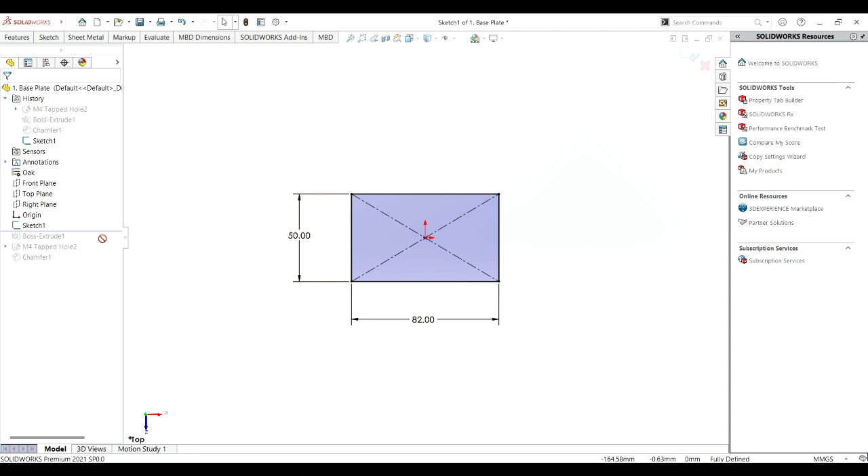Then I go to the extruded boss feature and extrude this rectangular shape for 16 mm height, and it will be like this. It will be a box.

There are 4 tap holes on the top of the base plate. First I make a center line between this point and this point, which is 41 mm, and this point to this point is 25 mm. I sketch a hole here and here, and mirror it, giving 4 holes. The length between this hole and this hole is 38 mm, and this hole and this hole is 35 mm.

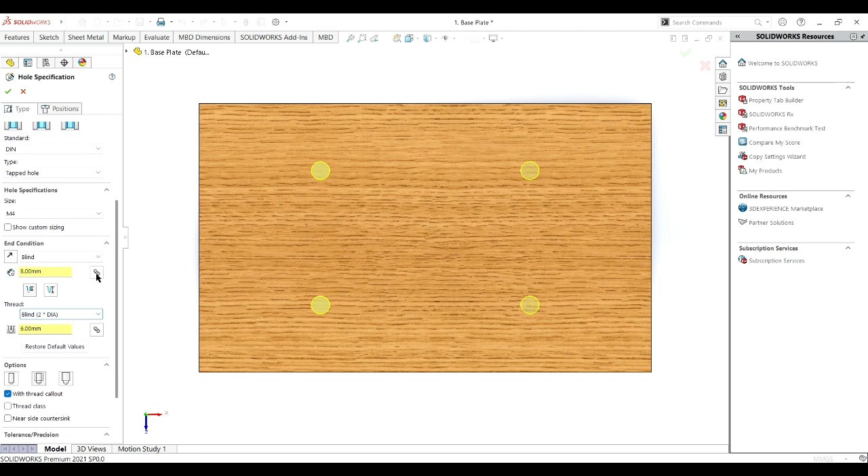I choose the standard and the tap hole type. The size is M4, with a hole length of 8 mm and a thread length of 6 mm. So it will be like this.

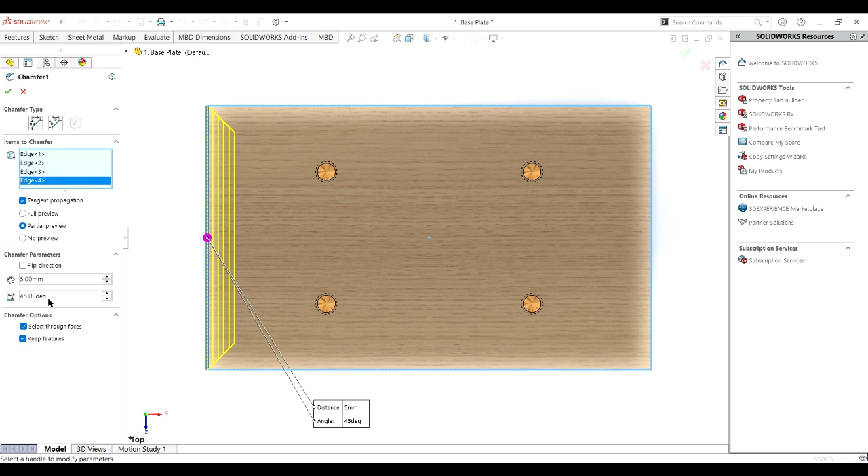Then I choose the chamfer feature. I go to the top plane of the base plate and choose 4 edges, this edge, this edge, this edge, and this edge, and set it to 5 mm at 45 degrees. The final result will be like this.

We move on to the second part of the pneumatic motor, which is the mounting bracket. I made a line here to here, up to here, here to here, and down here to here, and here to here. Then I choose these two lines to be collinear and equal, and set the length between this point to this point as 48 millimeter, this point to this point as 24 millimeter, and this point to this point as 16 millimeter.

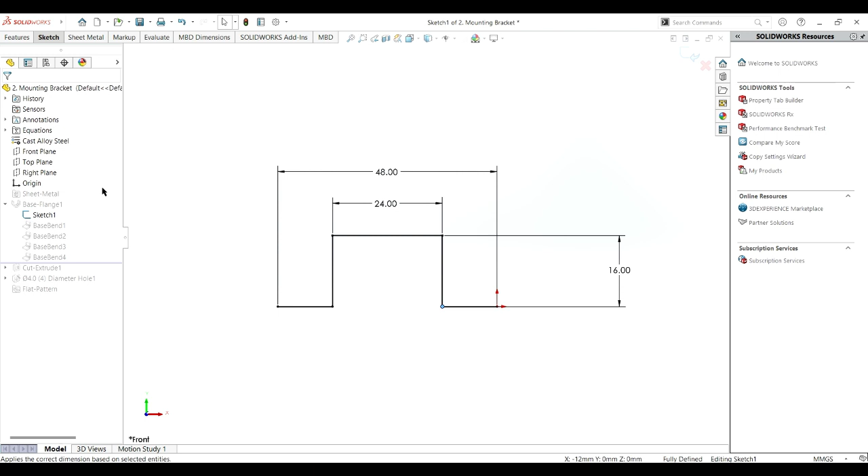Then I go to the features, the sheet metal features, and choose base flange, setting it to the blind direction with a length of 35 millimeter, and it will be like this.

I choose the extruded cut feature. Before that, I sketch on the top plane of the mounting bracket. The sketch is 14 millimeter, and here the length is 28 millimeter.

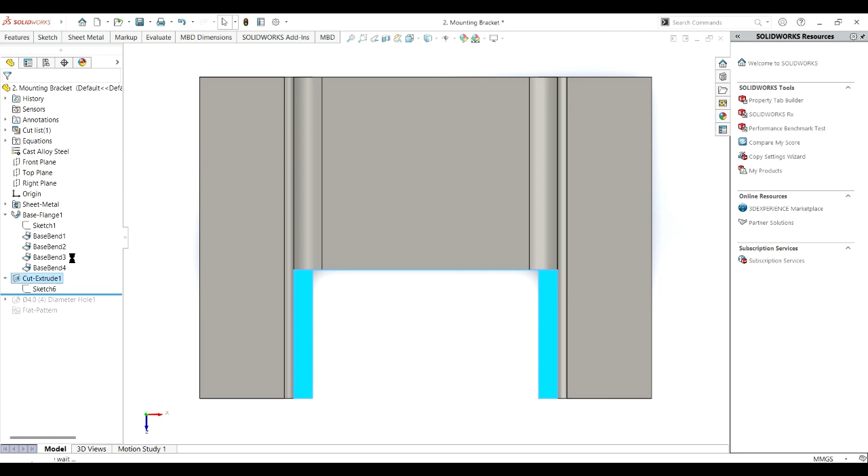Then I go to the extruded cut feature and cut the sketch that I sketched before on the top plane of the mounting bracket. I cut out this sketch, which is 4 millimeter, not 14, sorry.

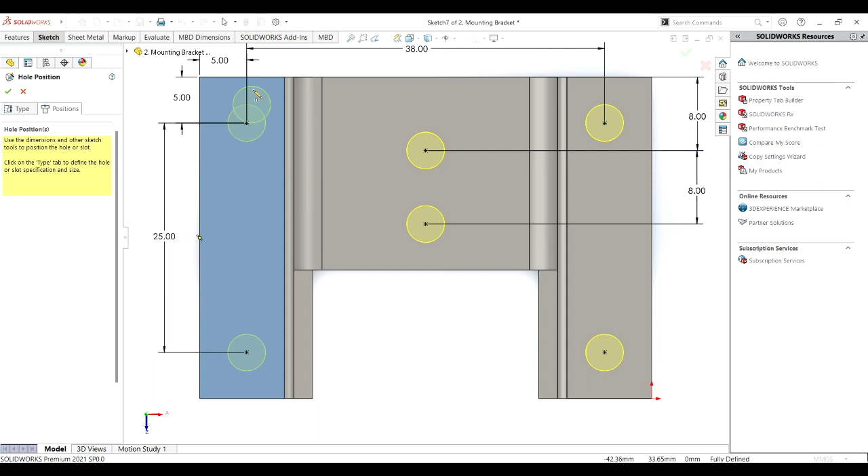We move to the top plane of the mounting bracket. I choose to make a hole, and the position of the hole, as you can see, this hole and this hole is 38 millimeter, the length between this hole and this hole is 25 millimeter, the length between these two holes is 8 millimeter, and the length between this hole and this line is 8 millimeter. I put this hole's midpoint to here as 5 millimeter, and also here midpoint to here as 5 millimeter.

Then I chose the standard DIN, the type is drill size, the size is 4 diameter, and the end condition is through all. So we click right, and it will be like this.

We move on to the third part of my project, which is the motor block. I start to sketch with a line from the midpoint, from this point to this point, then up to this point, then move to the right, make a line down to this point, then down to this point, move to the left this point, and up back to the midpoint.

We go to sketch and choose smart dimension, setting the length between this point to this point as 62 millimeter, this point to this point as 40 millimeter, this point to this point as 30 millimeter. You can see the length of the line is 21 millimeter, this length is 38 millimeter, and this length is 12 millimeter.

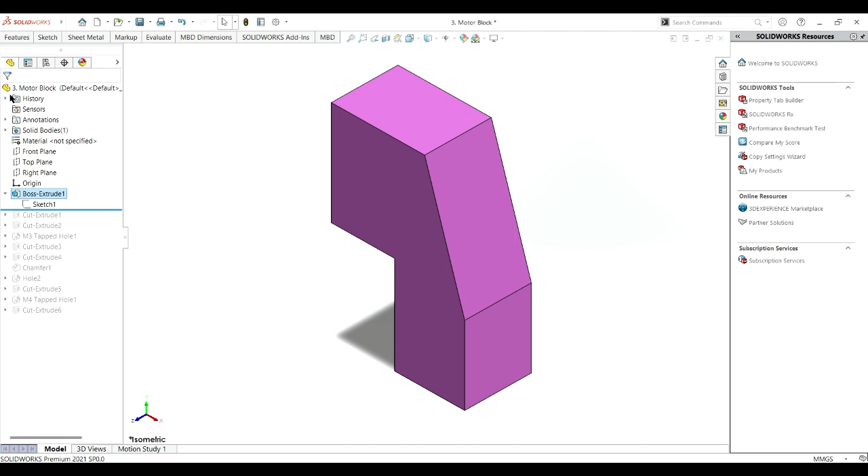And then I choose extruded cut feature, but before that I sketch on the top plane of the motor block. I sketch a circle, one big circle and a small circle.

I choose sketch and choose line here, and choose a center line, and I put a center line from here to here. And then I go to smart dimension, and then I choose this point, to this point, which is 10 millimeter.

And then I draw a circle from the center line, one big circle and one small circle, and the diameter of the big circle is 14 millimeter, and the small circle is 4 millimeter.

And I put the length between the center line of the big circle into this line as 10 millimeter, and then I draw a line between this point of the small circle to the big circle, and also mirror it to the bottom of the circle.

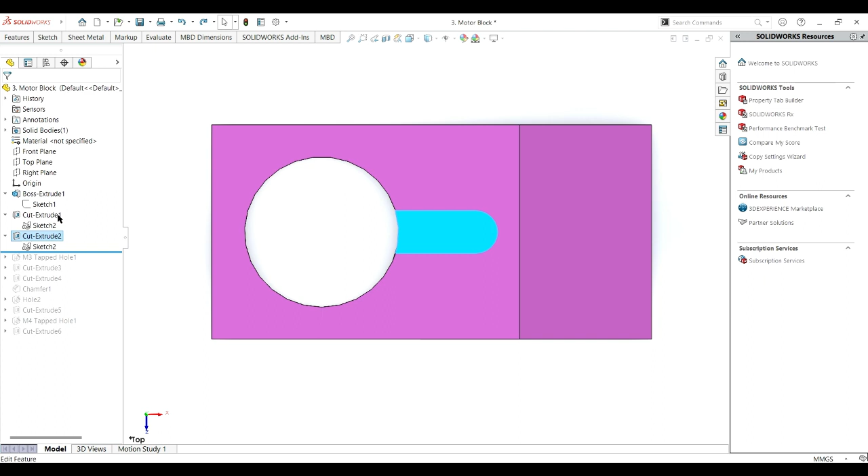We go to the extruded cut feature, and I take this area and this area, I put it on a blind direction and put the length to 2 millimeter.

And then I will do the 4 tap holes on the top plane of the motor block. First, I sketch - oh, you can see here.

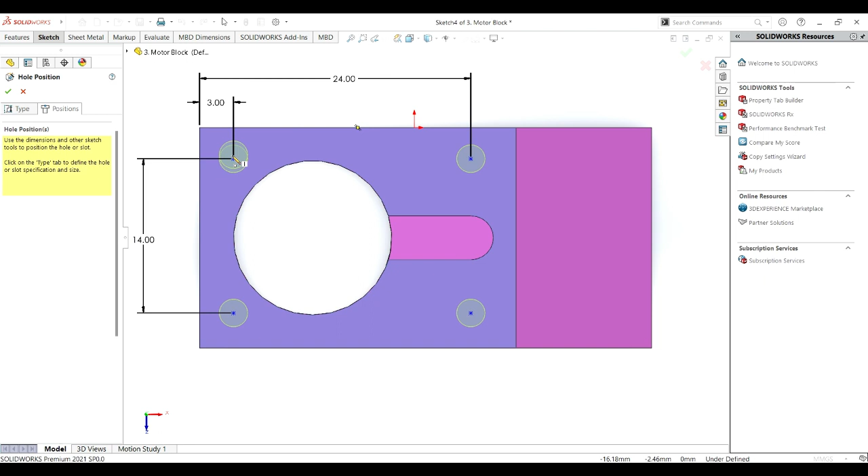So here is the position of the tap hole. I put it here, here, here and here, 4 holes, and the length between this hole and this hole is 14 millimeter, and this hole is 24 millimeter, and the length from the midpoint of this hole is 3 millimeter to the upside, and to the left side is also 3 millimeter.

And then I choose the hole standard as DIN standard, and the type is tap hole, and the size of the hole is M3, and I put it on a blind condition, and the thread length is 6 millimeter, and the hole length is 9 millimeter, and it will be like this.

And then we move to - I sketch the side plane of the motor block. I sketch a circle, and the diameter of the circle is 5 millimeter, and the length between the midpoint of the circle to the bottom line is 20 millimeter, and this point to this point is 8 millimeter.

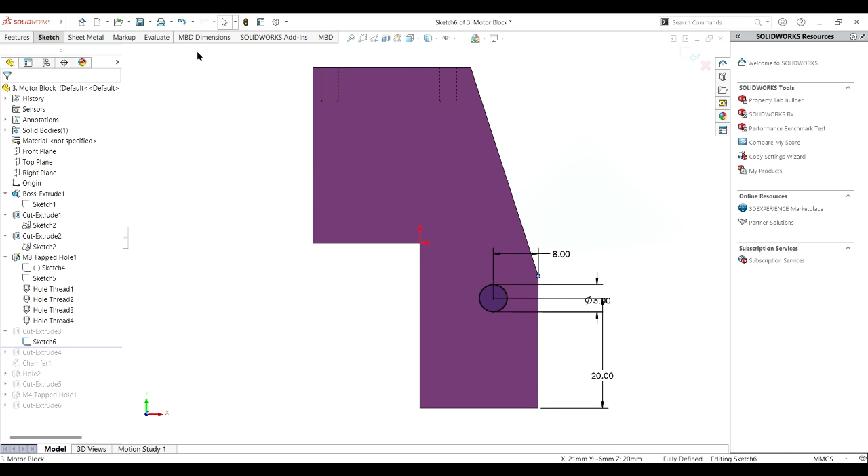So I choose, and then I choose extruded cut feature again, and I choose this hole, and I put the direction as through all on this sketch plane that I sketched before, which is the circle, and it will be like this.

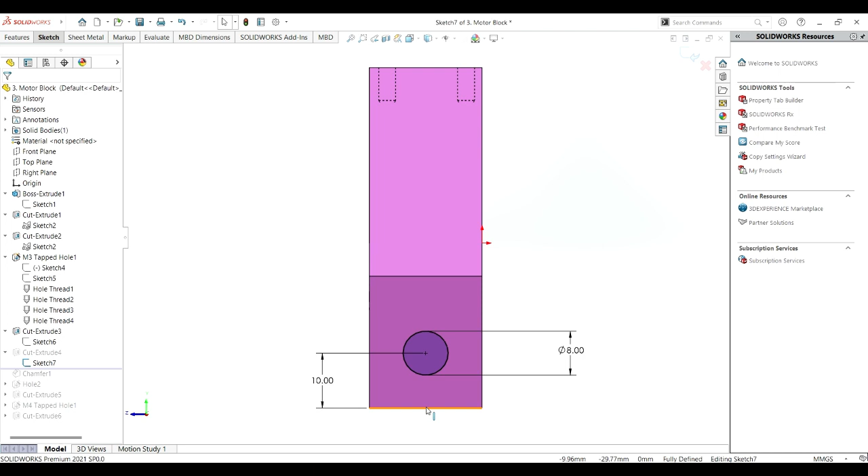So we move forward to the next sketch. The front plane of the motor block, I sketch a circle here, which is 8 millimeter, and I put it on the center of the motor block, and the length between the midpoint and this line is 10 millimeter.

And again I choose extruded cut, and I will cut out the circle that I sketched before, and I choose the direction as through all, and it will be like this. And here it is from the back.

And then I choose chamfer feature and take this edge at the circle that I've cut out before, and I choose the length as 1 millimeter and 45 degrees, and I click right here, and it will be like this.

After that I will make a hole. So here I choose the counterbore type, and then I edit the section dimension. The diameter is 2.5 millimeter, the depth is 48 millimeter, and the counterbore diameter is 4 millimeter, and the counterbore depth is 30 millimeter, and I put the end condition as up to next, and it will be like this.

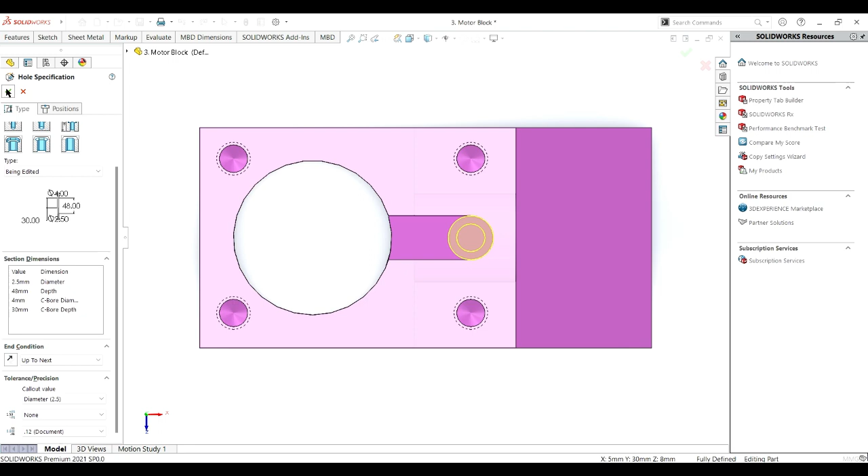As we can see here, the hole that we made here.

And then we move to the next sketch. Sketch two circles at the back of the motor block. The diameter of the circle is 3.2 millimeter, and the length between the midpoint of the circle to the upper line of the motor block is 17 millimeter, and the length between two circles is 6 millimeter.

And then I choose extruded cut feature, extruded cut feature, here.

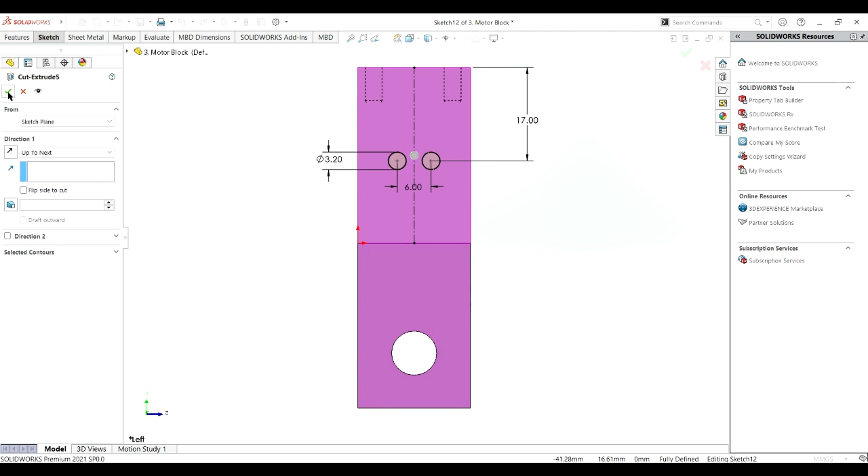I choose this circle, these two circles, and the direction is up to next, and I click right here, and it will be like this. We can see from the top of the motor block, these two circles is there.

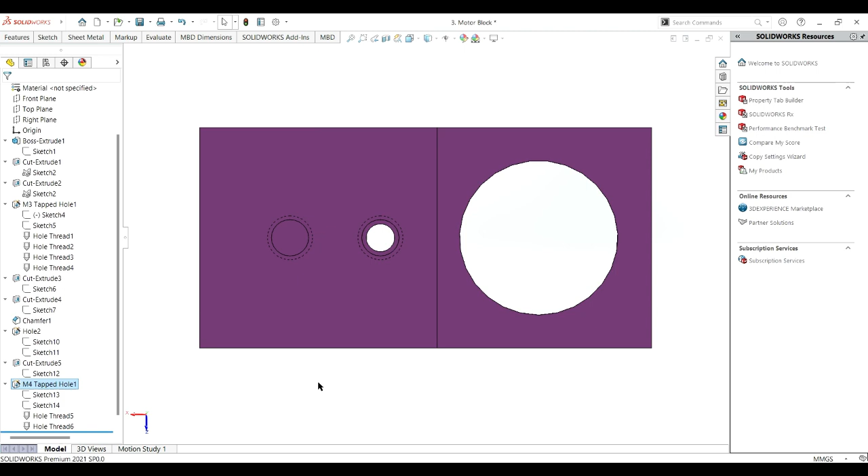Then I will make a hole at the bottom of the motor block. So I sketch two circles here and here, and the length between these two circles is 8 millimeter, and the length from the midpoint of the circle to the end line here is 8 millimeter. I choose the standard DIN, the type is tap hole, and the size is M4, and the end condition is up to next. So I click right here, and it will be like this.

As we can see here, the hole that we made is there. Okay, and we move on to the last sketch, which is on the bottom of the motor block.

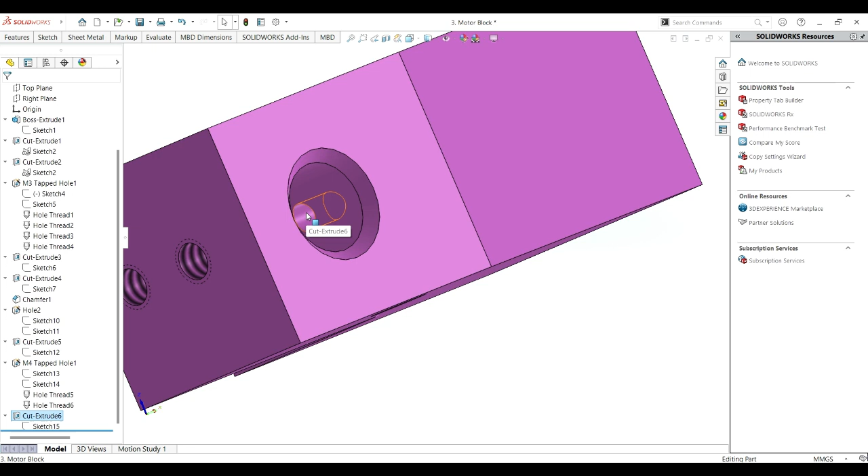So I sketch a small circle here, I will zoom in, is 2.5 millimeter, and I choose extruded cut feature, and I will cut the circle here that I sketched, and I choose the direction up to surface. I will click right here, and the circle will be there, up to the next here.

So the circle is there, and that's all for the third part of my project, pneumatic motor, which is the motor block. Next, for the next part is the cylinder head.

I choose the top plane, and I sketch a rectangular shape from the midpoint, and the width of the rectangular shape is 20 millimeter, and the length of the rectangular shape is 28 millimeter.

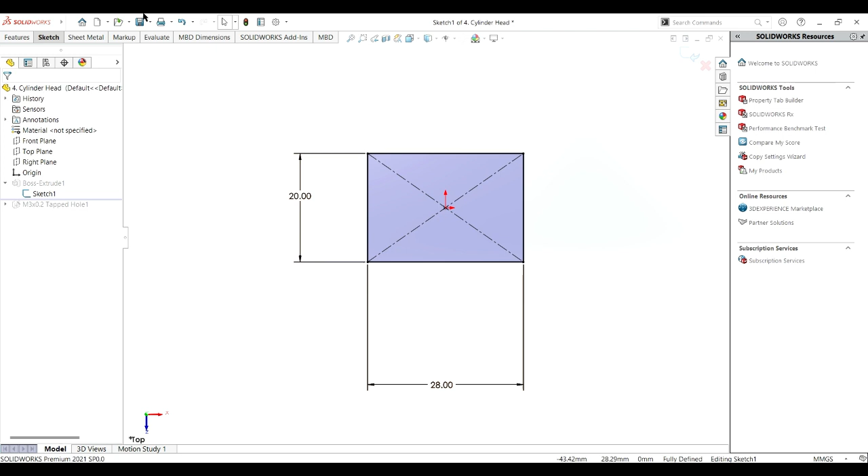Then I choose the extruded boss feature, and I put it in the blind condition, and the length of the extruded boss is 3 millimeter. So I will click right here and it will be like this.

And then there is a 4 tapped hole on the top of the cylinder head. So here is the position of the hole. There's 4 holes, and the length between this hole and this hole is 21 millimeter, and the width between this hole and this hole is 14 millimeter.

And I choose smart dimension, and then I choose this point to this line is 3 millimeter, and this point to this upper line is 3 millimeter also.

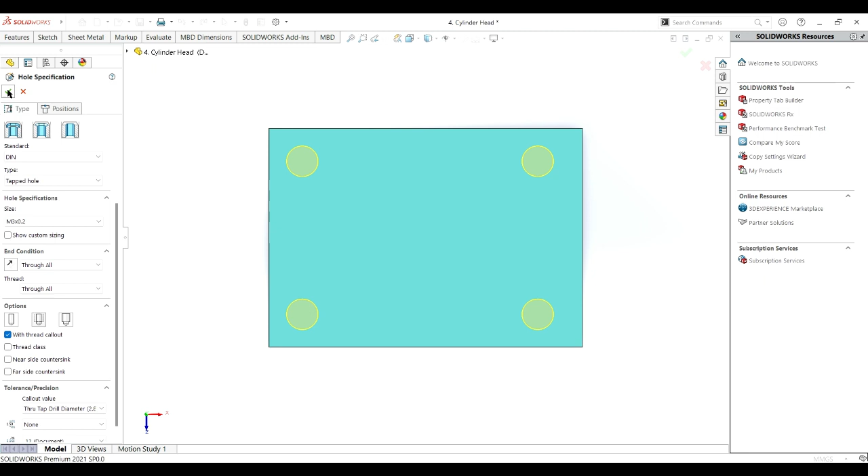And we go to the type, and I choose the DIN standard and the tapped hole type, and the size is M3 times 0.2, and the direction is through all. And I will click right here, and it will be like this.

So here is the hole with the thread. So I will change the transparency to make it look much better. So here it is.

Okay, for the next part, I will do the flywheel. First, I will make a circle, one big circle from the midpoint of the sketch.

Or before that, I choose the front plane, and I made a circle from the midpoint, which is 50 millimeter diameter. And then I made a construction circle which is 24 millimeter diameter, and I made this hole on the construction circle which is 10 millimeter.

And I go to the sketch, and I choose linear sketch pattern and circular sketch pattern, and I choose this one circle, and it will be 4 circles here on the sketch, the construction circle.

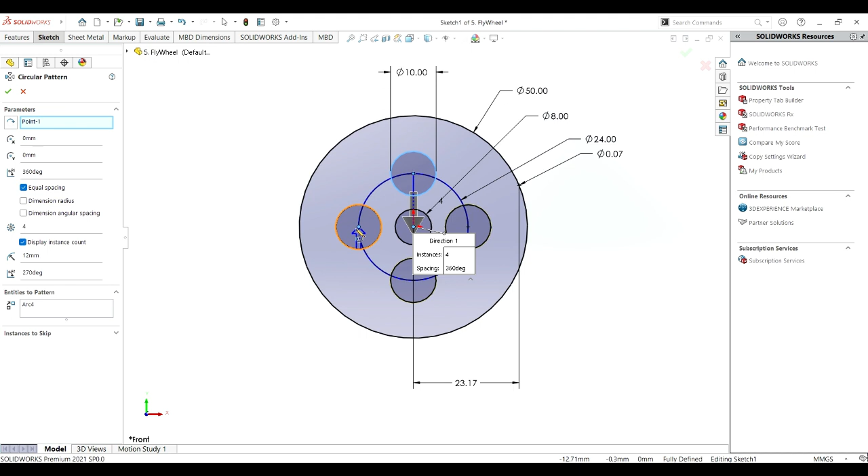And I click right, and then I sketch a small circle from the midpoint, and the diameter is 8 millimeter.

After that I choose extruded boss. I choose extrude boss, and we go to the front plane. So I choose this 5 holes that I sketched before, to the blind direction, and I put it 10 millimeter. So I click right here, and it will be like this.

After that, I will sketch at the back of the flywheel. So this circle here is 36 millimeter.

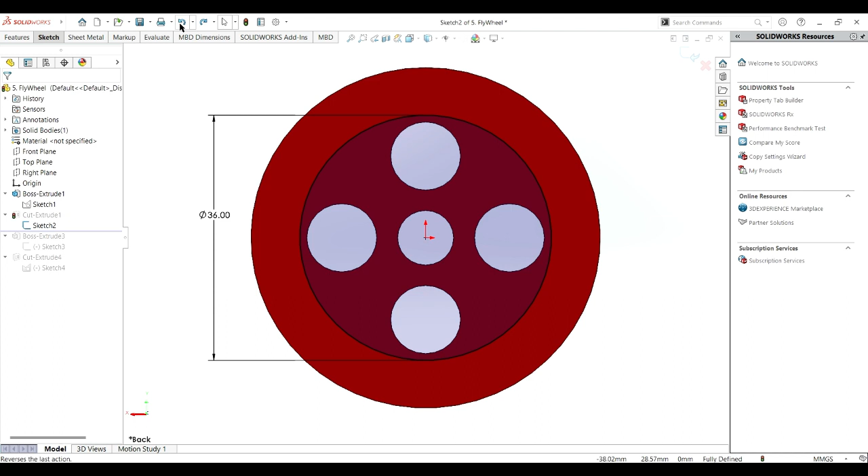And I will choose extruded cut to cut the circle that I sketched at the back plane of the flywheel. So I choose the direction is blind, and the length is 4 millimeter. So I click right, and it will look like this.

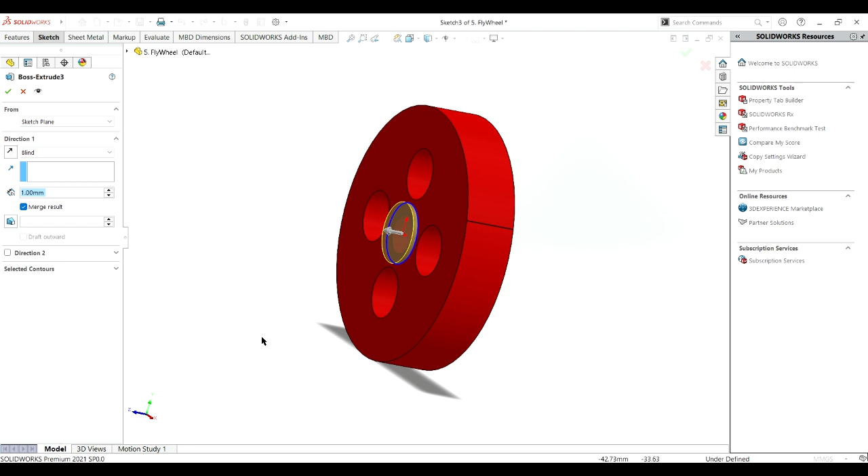After that, I will sketch a circle at the front plane of the flywheel. The diameter is 12 millimeter, and then I choose extruded boss feature, put it in a reverse condition and blind direction, and the length is 1 millimeter, and it will look like this.

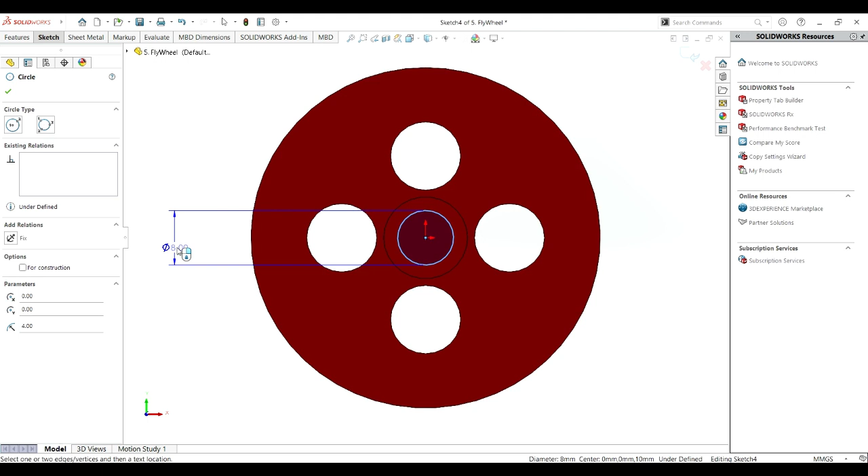Then I sketch on the front plane of the flywheel a circle from the midpoint, and the circle diameter is 8 millimeter, as we can see here. Then I choose extruded cut feature, put it through all and in reverse condition, click right here, and it will look like this. So here is the result of the flywheel.

And we will move on to the next part. The next part is crankshaft. I choose the front plane of the crankshaft, and I sketch a circle from the midpoint, and the diameter is 8 millimeter.

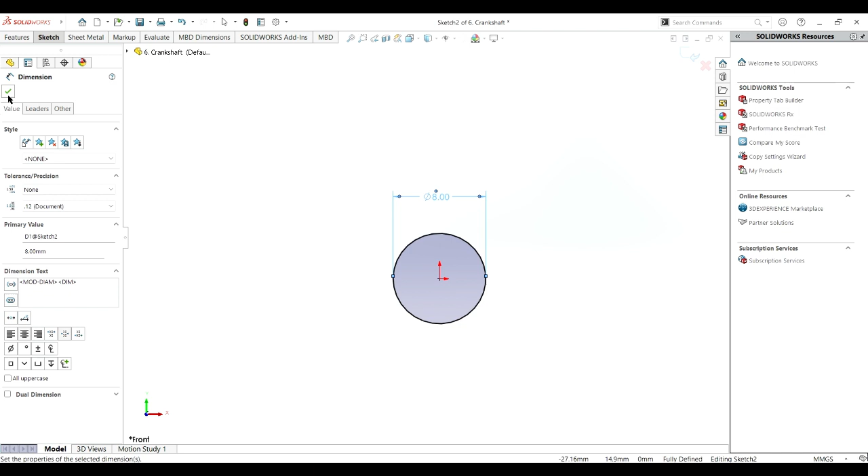And then I choose extruded boss feature and put it on a blind condition, and the length is 25 millimeter, and it will look like this.

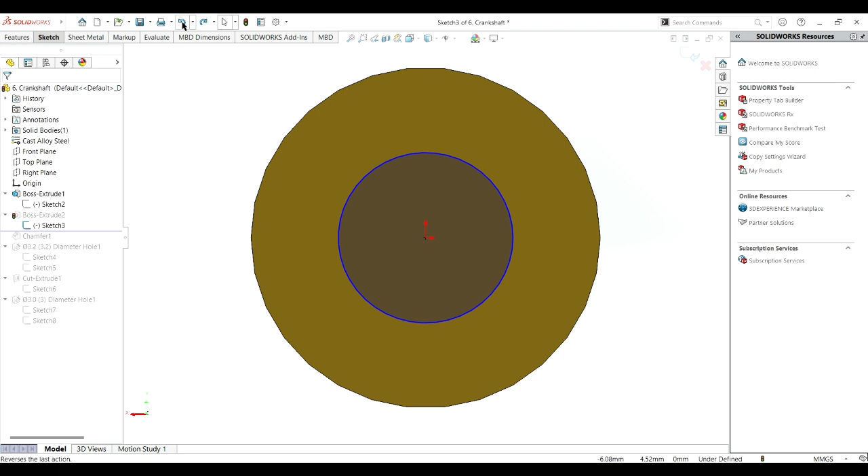Then I will sketch a circle on the top plane of the crankshaft from the midpoint, and the diameter is 4 millimeter. Then I choose extruded boss feature, put it on blind condition, choose the sketch circle I sketched before, and put it 12 millimeter length, and it will look like this.

After that, I will make a chamfer on the top of the crankshaft. I choose this face, and the distance is 0.5 millimeter, and the angle is 45 degree. I click right here, and this is the result of the chamfer.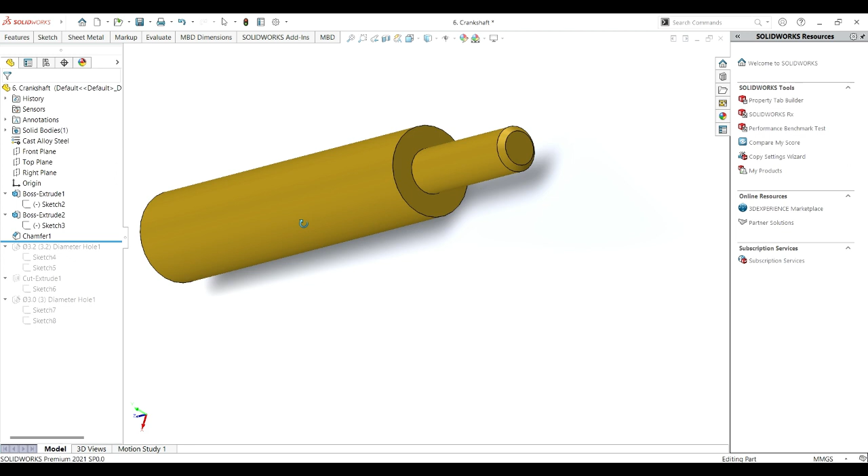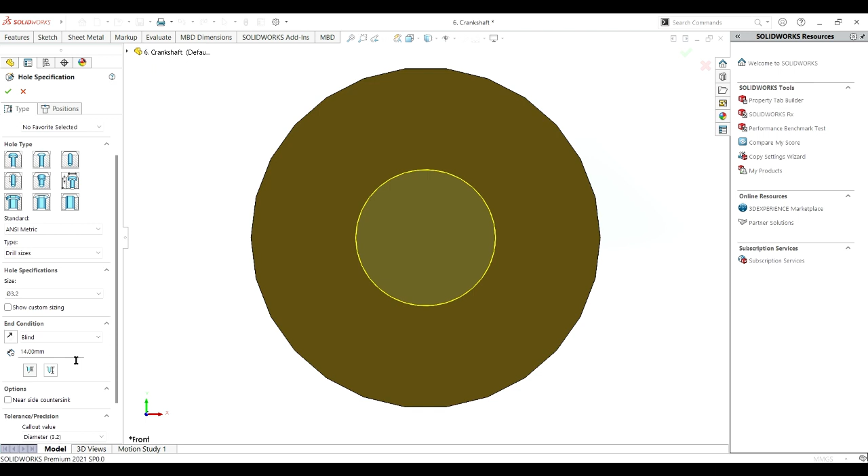After that, I will make a hole at the front plane of the crankshaft. Here is the position of the hole, I sketch a circle from the midpoint. I choose the standard ANSI metric, and the type of the hole is drill size, and the size is 3.2 diameter. I put the condition on blind condition, and the length is 14 millimeter. The thread length is 14 millimeter, click right here, and it will look like this.

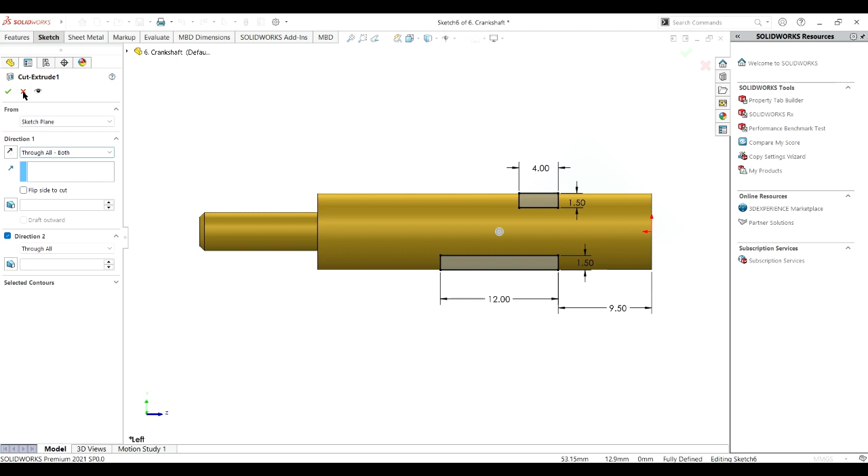And then I will cut. So we go sketch on the side, right plane of the crankshaft. I sketch a rectangular shape here, width 1.5 millimeter and length 4 millimeter, and at the bottom I sketch another rectangular shape, also width 1.5 millimeter and length 12 millimeter, with 9.5 millimeter between the two points. Then I choose extruded cut feature on the side of the crankshaft, choose both rectangular sketches, direction through all, choose both, and it will look like this.

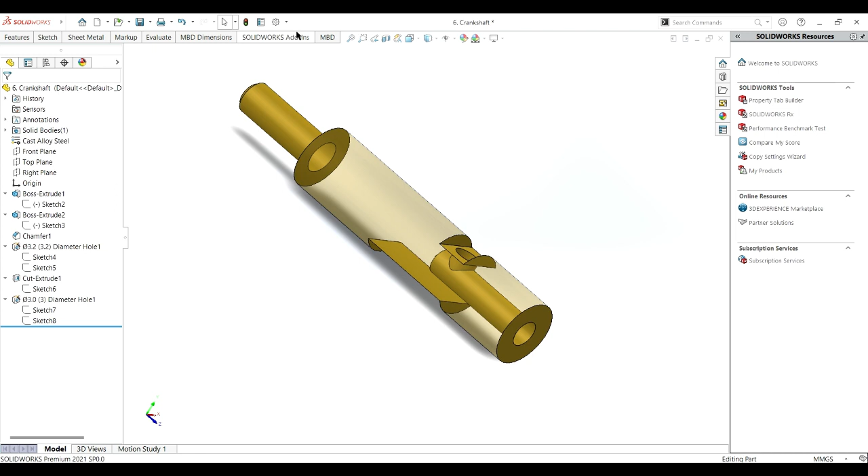Lastly, I will make a hole on the surface that we cut before. I drew a circle on this surface, put it at center, and the standard is ANSI metric, the type is drill size, and the size of the hole is 3 millimeter diameter. I put the condition as up to next, so it will look like this. I will change the transparency to see the hole. And this is the final product of the crankshaft.

For the next part, I will do the crank of the pneumatic motor. First, I will sketch a circle from the midpoint which is 11 millimeter diameter, and I made another two circles, choosing the same circle from the midpoint, each 8 millimeter diameter.

I made this circle 8 millimeter diameter, and also this circle 8 millimeter diameter, then I choose trim entities and remove the arc here and here, and the arc down here and down here, and there is already empty here.

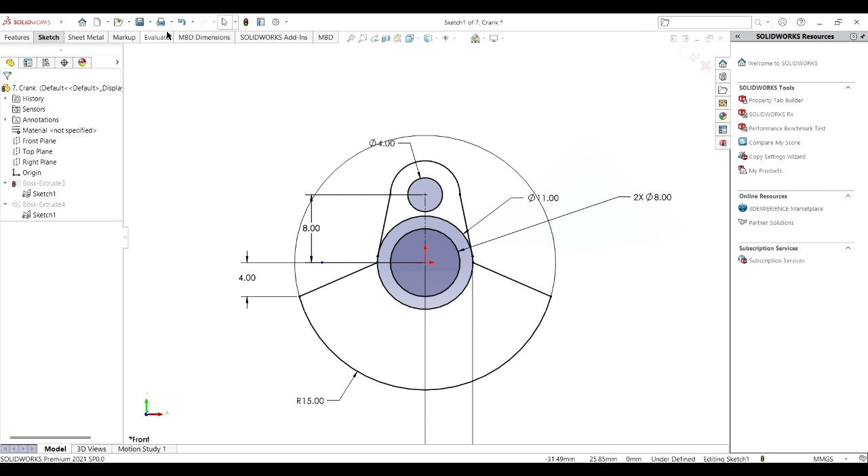Then I choose a line here, and put a line from this point at the 8 diameter to the 11 diameter circle, and also at this side. Then I choose center point arc, and from the center point I go to here and drag to here, and this is the arc. Then I choose this line and connect the arc at this point to the 11 diameter circle, and also this side, and then I define all that.

So the length between these two circles is 8 diameter, and this circle is 4 millimeter diameter, and this big circle is 11 millimeter diameter, and this inner circle is also 8 millimeter diameter, and the arc is 15 radius, and the vertical length from this point to this point is 4 millimeter.

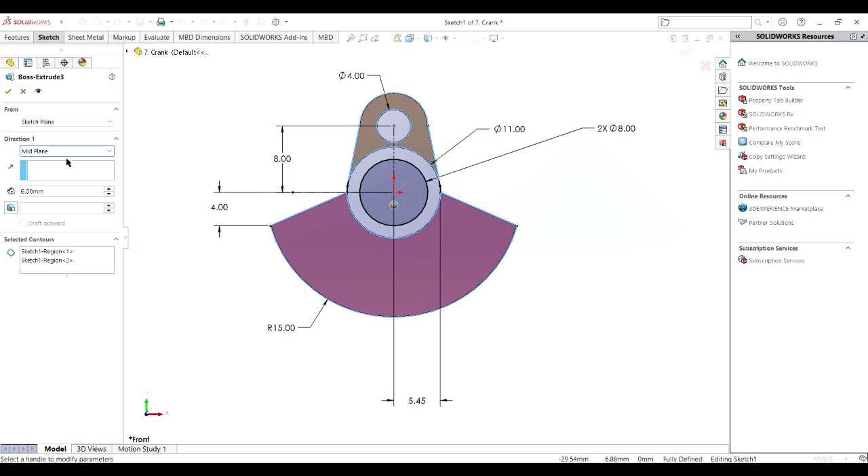And then I choose the extruded boss feature, go to the front plane, and I choose this surface, this one and this one, and I put it on the mid plane direction, and the length is 6 millimeter, and it would be like this.

After that, we'll hit the extruded boss again, and I choose the other circle here, which is between the 11 millimeter diameter circle and 8 diameter circle, and I put it on the blind condition, and I put 6.5 millimeter length. So it will be from here, from the back to the front. So it will be like this. And this is the result of the crank.

For the connecting rod of the pneumatic motor, first I do a construction line here, which is 35 millimeter, and then I sketch a circle.

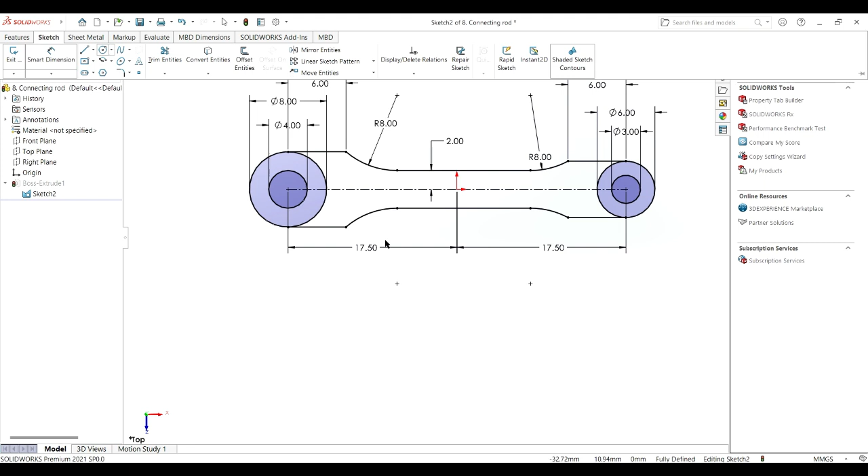Then I made a line. I choose this line, and I made a line from the mid point here, this point, and horizontally to this point, and this is 6 millimeter, and also at the right side from this point on the circle.

Vertically horizontally to the left side 6 mm, and I take the mirror entities and mirror this, and it will be at the bottom also and on both sides.

I made a line at the middle here. Here I made a line from this point to this point, and I also choose the mirror entities to mirror it to the bottom side.

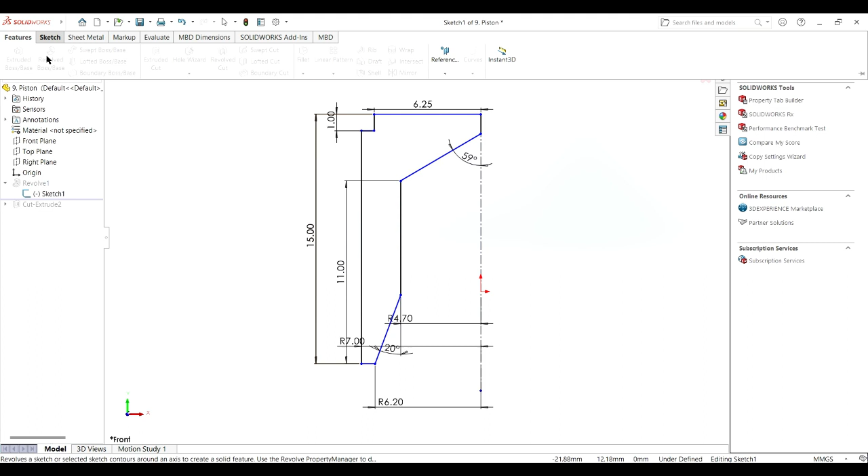After that I choose the revolve boss or base feature, from line 1, which is the center line, and I put the direction on blind, and the angle is 360 degrees, the whole thing, and it will look like this, and the piston will look like this.

Then I will sketch a circle at this surface, and the diameter of the circle is 3 mm, and the length between the midpoint of the circle to the bottom line is 7 mm. This circle is already centered because of the center line before.

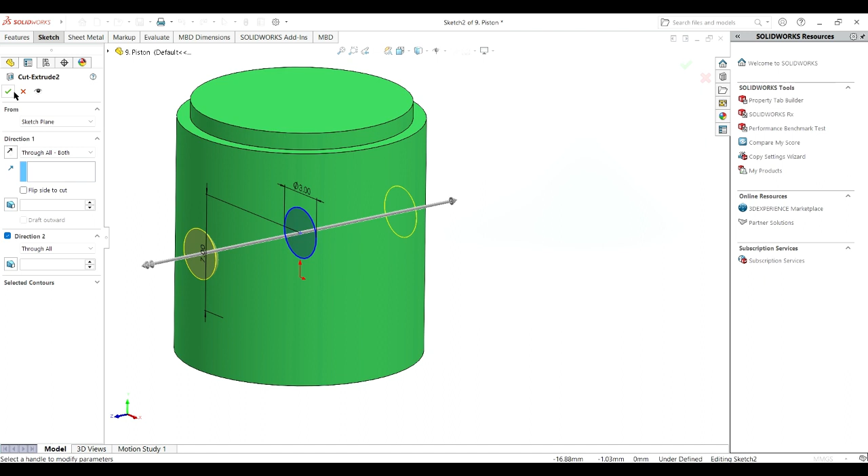Then I choose the extrude cut feature, and from the sketch plane, the circle sketch, I choose the direction through all to both sides, which is this side and this side, and I click right here, and it results in this. So this is the isometric view of the piston.

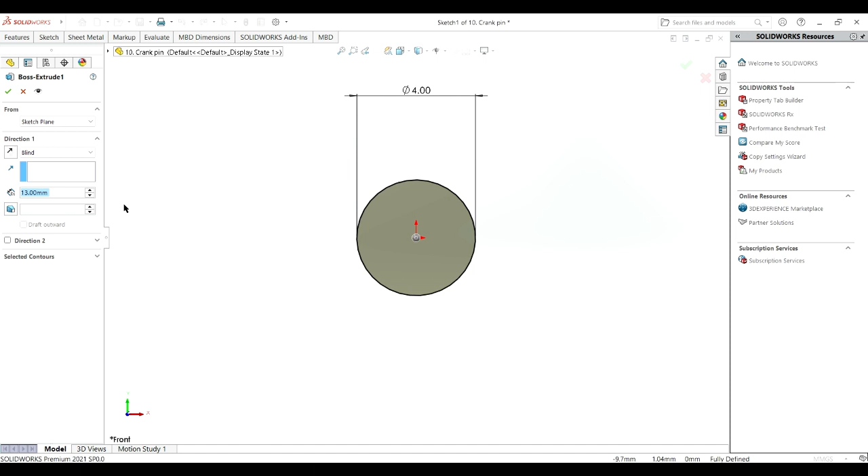We move on to the next part, which is the crank pin. First, I choose the front plane of the crank pin, and sketch a circle from the midpoint, with a diameter of 4 mm. I choose the extruded boss feature, and from the sketch plane I choose the blind direction, with a length of 13 mm. Roughly it will look like this.

So I click right here, and then we move on to the next sketch. The next sketch is at the top of the crank pin. I sketch a circle with a diameter of 3.8 mm, and then I choose the extruded cut feature.

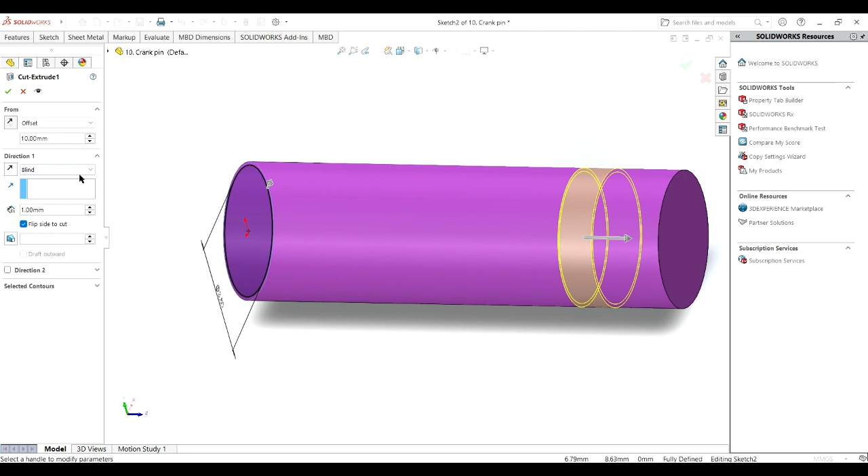I choose offset here, and the direction is blind. If we choose the sketch plane, it will be like this, but I choose the offset, and the cut will be here. I put it on the blind direction, and I cut it 1 mm. So I click right here.

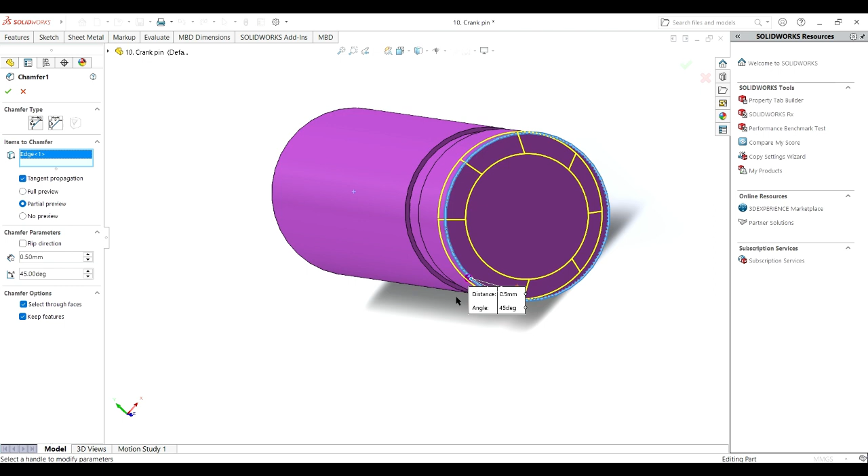After that, I will choose chamfer. I go to this side and choose this edge of the circle, and the distance of the chamfer is 0.5 millimeter and the angle is 45 degrees. I click right here, and this is the final product of the crank pin.

After that, we will do the piston pin for the pneumatic motor. First, I choose the front plane, and then I sketch a circle. I sketch this circle, and then make a smart dimension and set the circle to a 3 millimeter diameter.

Then I go to the extruded boss feature, and I choose from the sketch plane that I sketched before. The direction is mid plane, and the length is 13.5 millimeter. Roughly it will look like this. When I click right, it will be real like this, and then I will do the chamfer.

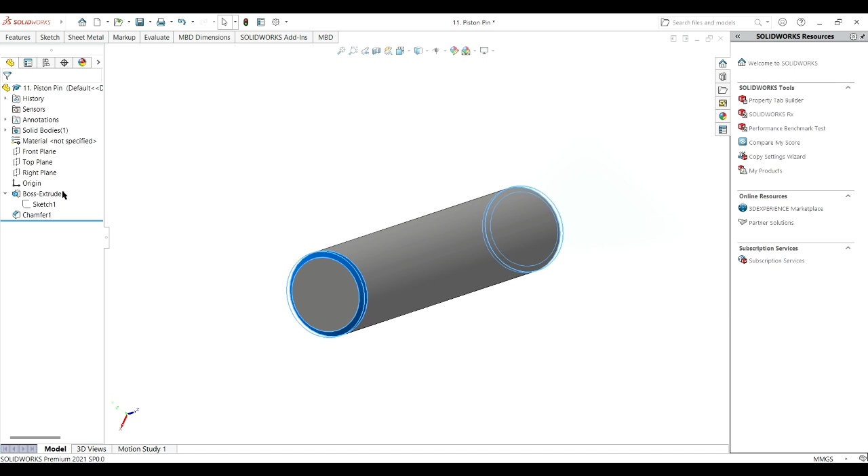I go to features and choose chamfer, and there's a chamfer here. I go to this side and choose this edge at this circle, and also the other side, this here. The distance is 0.2 millimeter and the angle is 45 degree. When I click right here, it will look like this, and this is the piston pin of the pneumatic motor.

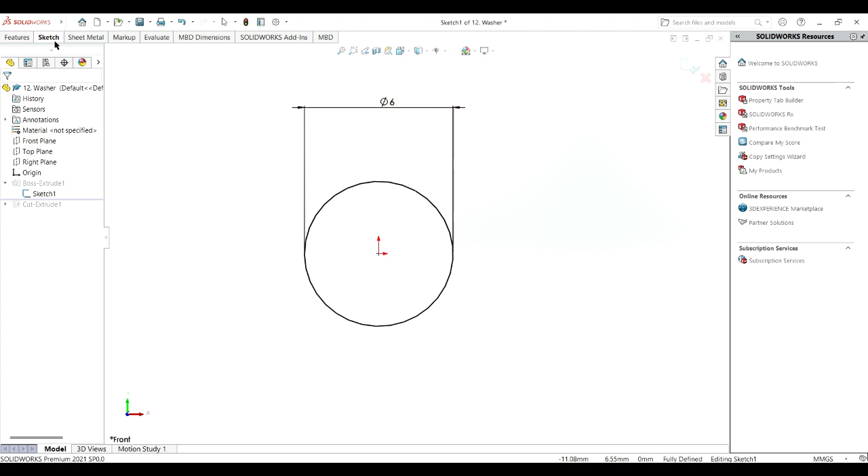For the washer, first I choose the front plane and sketch a circle from the midpoint. I take a smart dimension and make the circle a 6 millimeter diameter, then exit sketch and go to the extruded boss feature. I extrude the boss from the sketch plane, the direction is blind, and the height of the extruded boss is 1 millimeter, so it will look like this. I click right, and this is the product of the sketch that I extruded before.

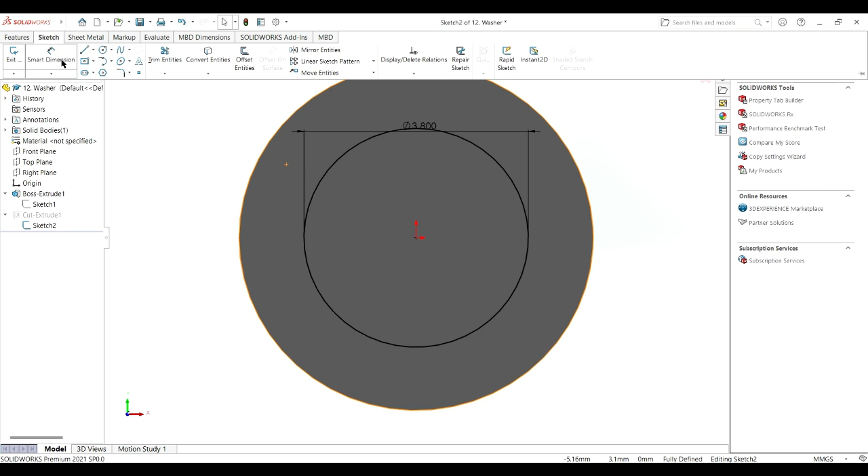Then I will cut a hole at the middle of the extruded boss. Firstly I sketch a circle from the midpoint, then a smart dimension, and define this circle as 3.8 millimeter diameter.

Then I exit sketch, and I choose extruded cut here, from the sketch plane, and the direction is through all. I click right here, and there will be a hole at the middle of the washer, and as you can see here, the product should be like this. The washer is really like this.

Here I will assembly all the parts that I've made before. So I will put inside all my parts here. Firstly I will choose the base plate and the mounting bracket to put it here, to attach them together.

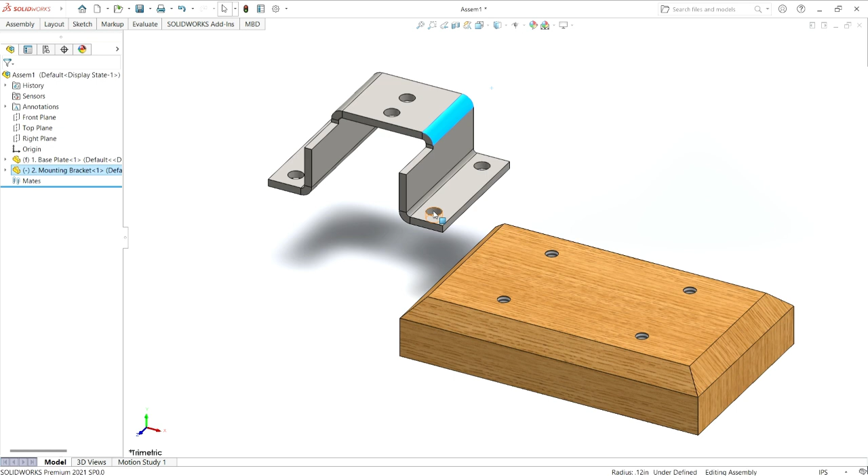So here we can see we got the mounting bracket and the base plate, and I will choose this hole to put it up here at the upper surface of the base plate. So I am using mate, and I will mate with this base plate hole here with concentric relation. So I finish mate.

The mounting bracket is still moving there, so I will choose this hole to mate with this hole. So I click right, and this hole also to fix with this hole.

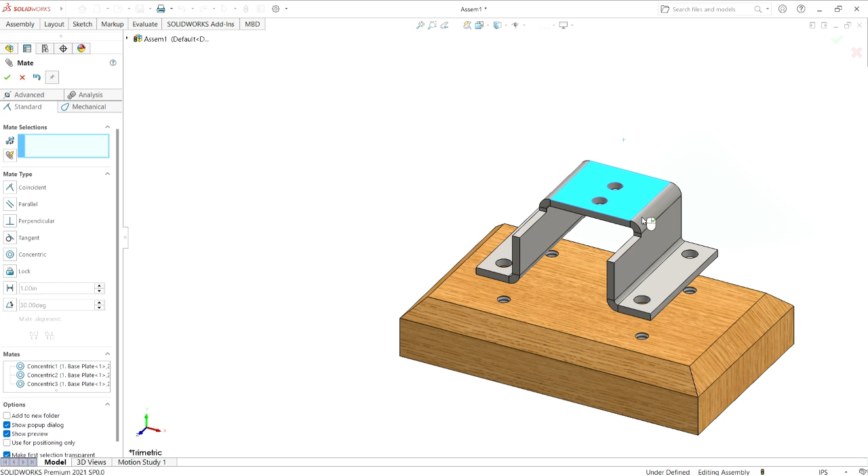As we can see here, the mounting bracket is still moving and not attached to the base plate. So I will choose this bottom surface of the mounting bracket and this upper surface of the base plate. And finally, they will attach together and not moving. So the mounting bracket is not moving.

For the next part, I will insert the motor block, and also I will insert the flywheel and the crankshaft that will put with the motor block.

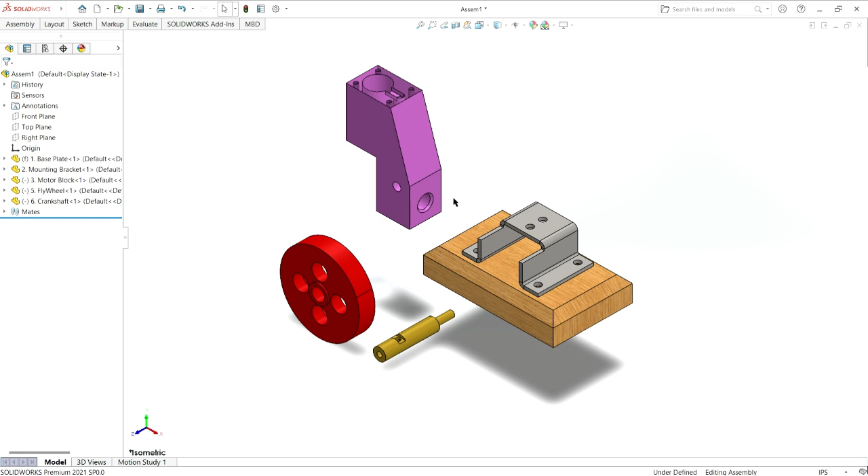Here you can see the motor block. So I will attach this motor block with this mounting bracket. So I will choose mate, click mate, and I'll choose this hole, and I will mate with this hole.

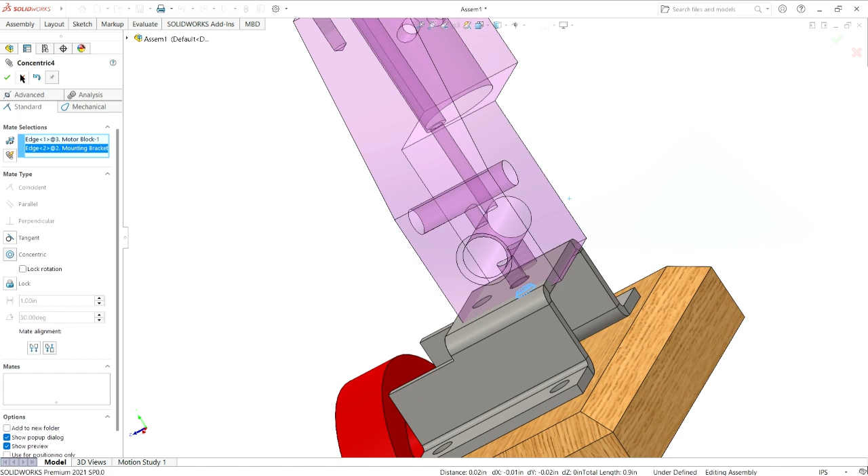The motor block is still moving there. I will choose this another hole at the bottom of the motor block and fix with this second hole of the mounting bracket. I mate it together on the concentric relation and click finish mate.

So to fix both parts, I will choose this surface and this upper surface of the mounting bracket, and they will attach and fix together on the coincident relation. So I click yes, and the motor block will not be moving.

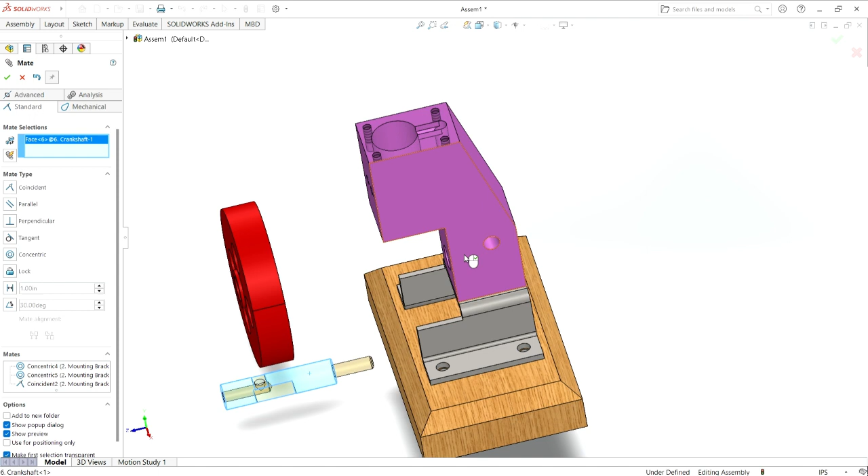For another part, I will put in the crankshaft into the motor block. So I click the crankshaft here, and the hole inside the motor block. For concentric relation, I click yes, and the crankshaft will be inside the motor block.

So for the flywheel, I will put it back here. So I will choose this hole and I will mate with this crankshaft here for concentric relation and click yes, and to make it not moving I will choose the surface and mate with this motor block surface here with coincident relation. So I will click yes.

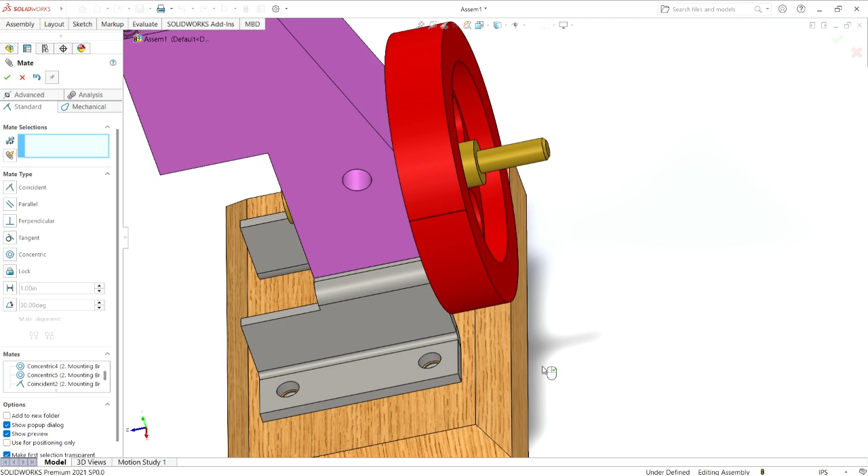As we can see here, the flywheel is rotating but not with the crankshaft. I will make this crankshaft rotating with this flywheel. So I will choose flywheel here.

I choose the right plane of the flywheel and hold Ctrl key and choose the right plane of the crankshaft. Right click and choose mate. And I will click yes for coincident relation. So we can see the crankshaft is rotating with the flywheel.

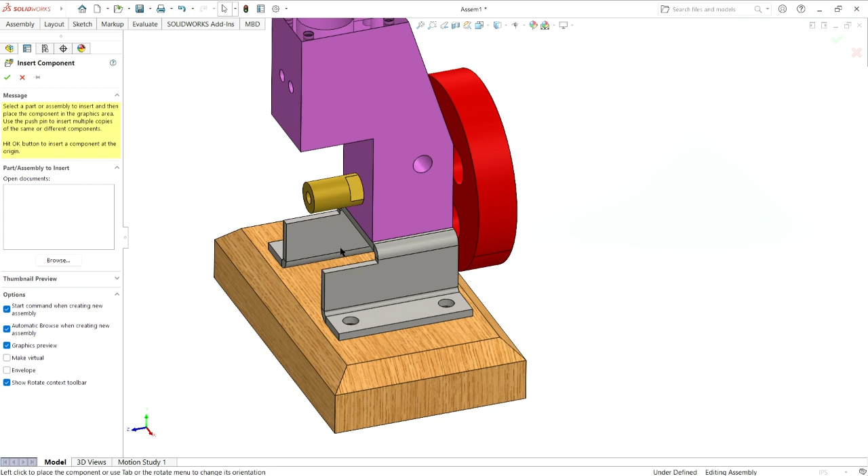For the next part, I will insert another part which is the crank, the connecting rod and the piston. So I will put it here, here and here.

Oh, I forgot another part which is the piston pin. I will insert the piston pin. We click right here. So I will make this piston pin and this piston, I will put the piston pin inside the piston.

So first I will make the piston pin. I choose the front plane of the piston, hold Ctrl key and choose the front plane of the piston pin. Right click and mate them together. Click right and then I choose this piston pin surface and I will put it inside the piston. So it will look like this. Click yes.

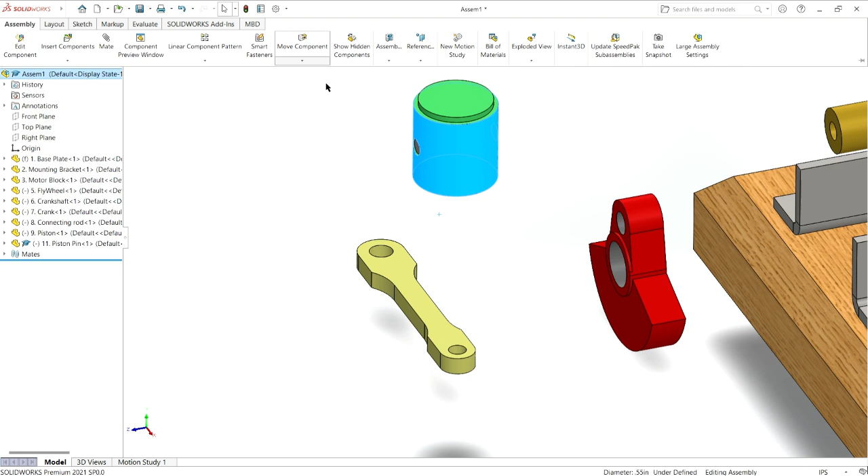For the connecting rod, I will put it inside the piston. I will attach with the piston pin. To make it easier, I will rotate the connecting rod first.

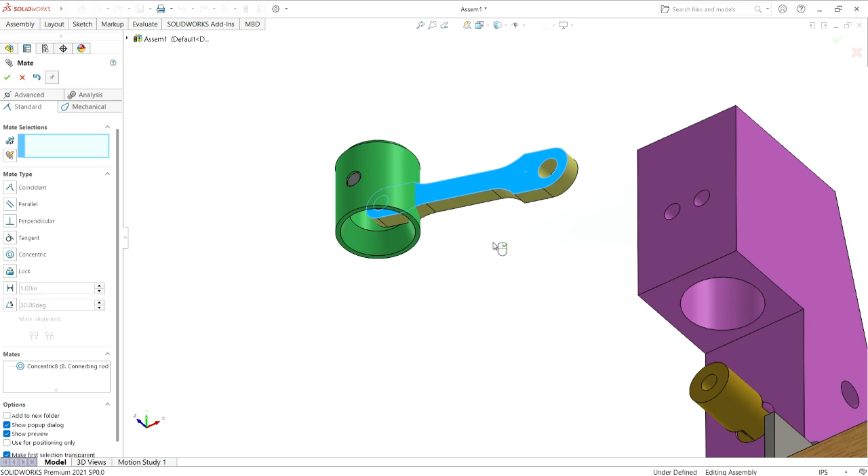So we go to mate and I choose this hole with this piston pin. Click right for concentric relation. We'll choose here and here. It will look like this. This is the real one.

The connecting rod is still moving there, so I will fix it at the middle of the piston pin. So we do it again at the same as the piston that we're doing before at the piston and the piston pin.

So I choose piston pin here and the connecting rod. I choose the top plane of the connecting rod, hold Control key, and I choose the front plane of the piston pin. Right click and mate them together. For coincident relation and click yes. And the connecting rod is not moving, but it will fix with the piston pin.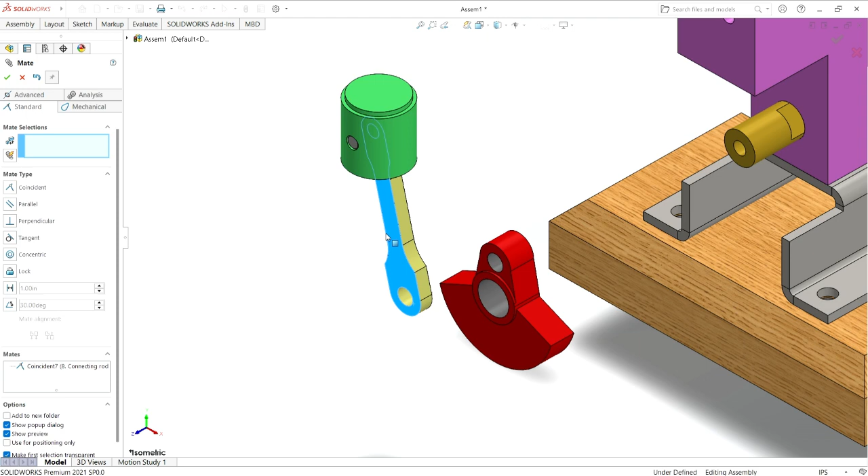For the next step, I will put the piston inside the motor block. So I will choose this motor block hole and this piston. Concentric relation and click yes. The piston will be inside the motor block, just moving inside the motor block.

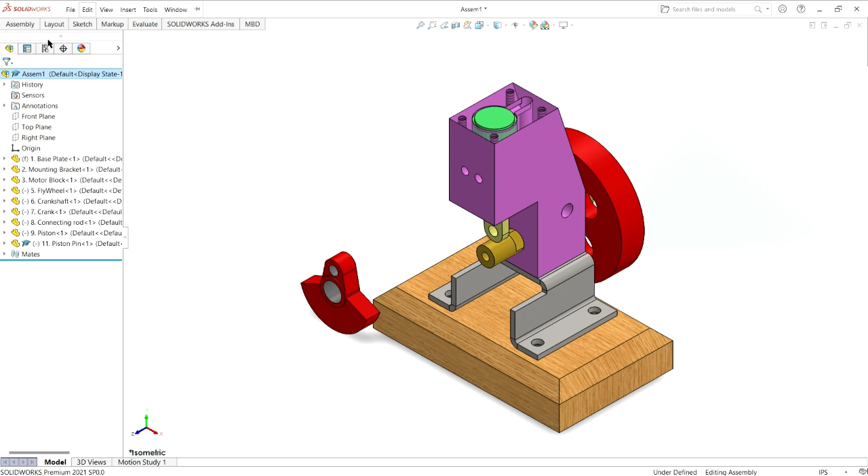For the crank, it is facing the wrong side, so I will rotate the crank first.

I will choose this hole and mate it with the crankshaft here with concentric relation, and the crankshaft can be inside the crank hole. Then I will mate this hole with this connecting rod hole. So for coincident relation, click yes, and it will look like this.

So for the next component, I will insert the crank pin and the washer. I will choose this crank pin and put it inside this hole. So I mate them together here with concentric relation. Click yes.

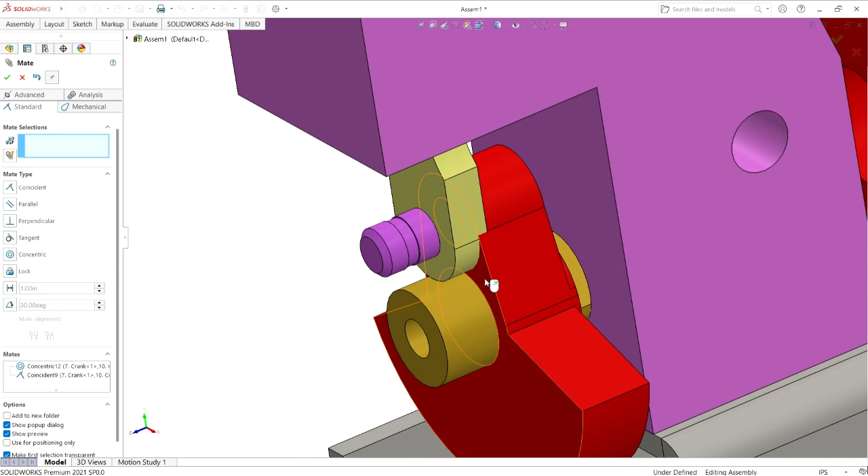So to fix the crank, I will choose this crank surface here and mate with this motorblock surface. Yes, and then - oh sorry, I will undo it.

So first I will put the washer first. I will choose the inside surface of the washer and the crank pin surface here. Put it here. You see, still moving.

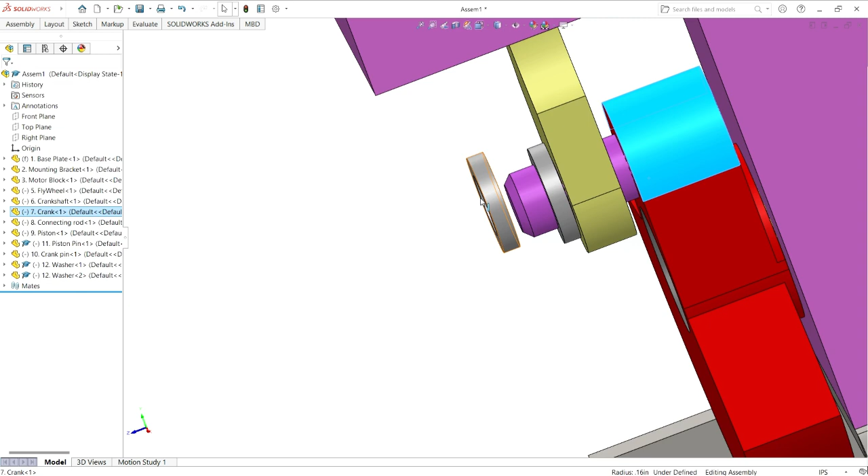We duplicate another washer, just hold the control key and it will duplicate another washer. I will choose this washer surface and mate with this crank pin surface here. So click yes.

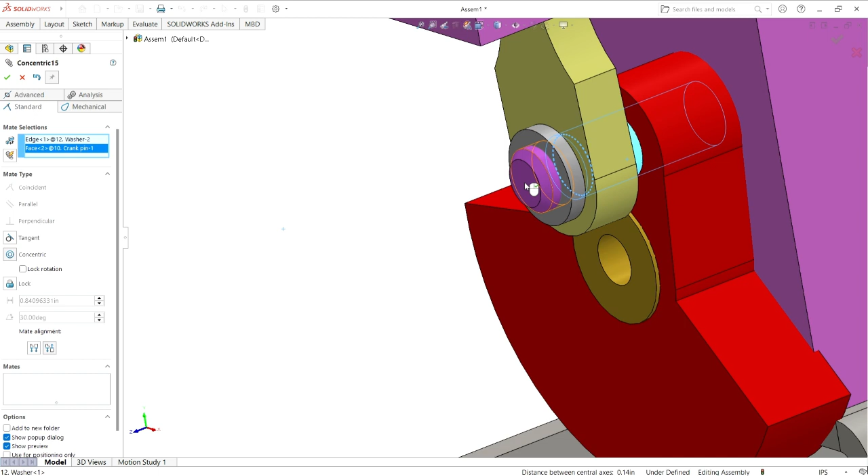So I will undo it back. Choose this washer and this crank pin. Oh, my bad. I will undo it. So I will do it again.

I choose mate. I choose this crank pin and this hole. Click yes. Still moving.

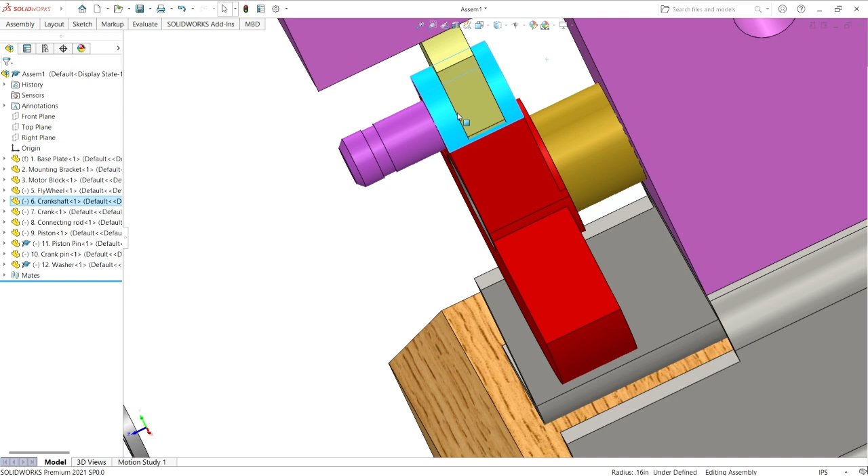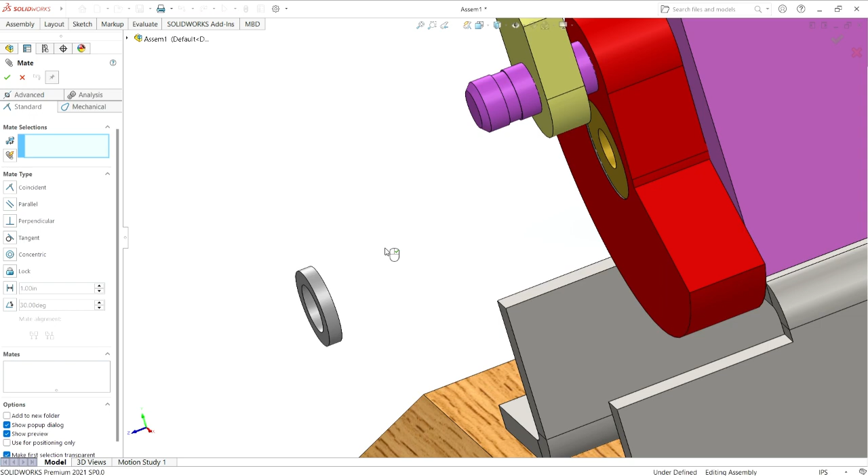Okay, I will click right here. So I will duplicate another washer, and I click this hole, and I will mate here with concentric relation and put it inside, and then...

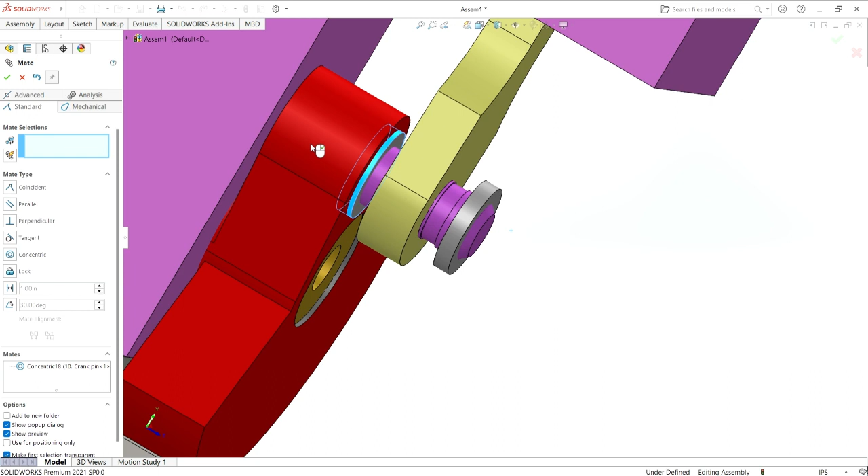I will choose this surface, and I will mate it with this continuous surface here with coincident relation, and click yes. And also for the crank pin, I will mate this surface with this crank surface. We will click yes, and lastly I will mate this surface with this continuous surface here. Click yes.

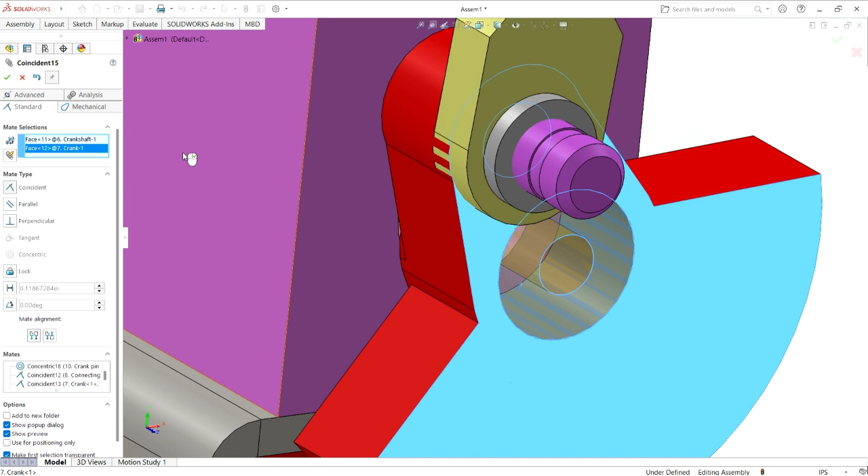And put it inside, and I will choose this surface and this motor block - no, oh sorry, we'll choose this surface and this surface together, and we mate them together, and still moving. So I will fix it by mating this crank with this motor block surface like that. So this is the result.

As we can see here, the crank is rotating, but not with the crankshaft and flywheel. So to make it rotate together, I will choose the crank here and the crankshaft. I will choose the right plane of the crankshaft, hold Ctrl key and choose the right plane of the crank. So right click and mate them together for coincident relation and click yes.

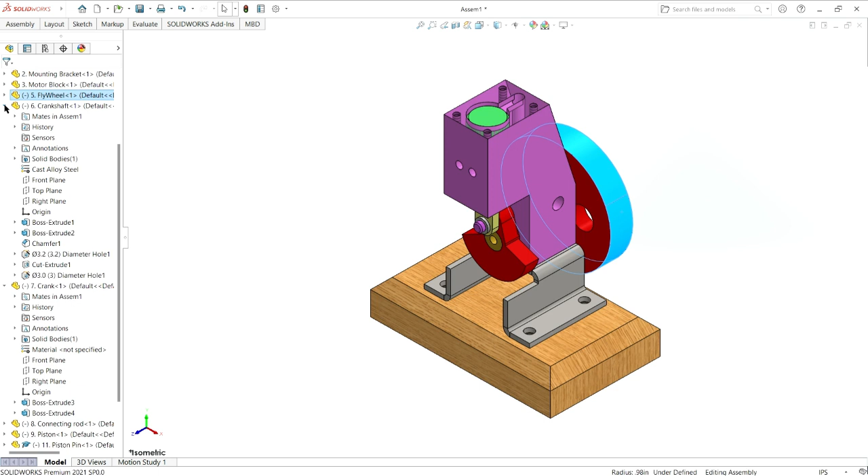For the last part, I will put the cylinder head on the top of the motor block. So I choose mate here. I will choose this hole and I will mate it with this hole. Here we click yes, and the cylinder head is still moving.

To fix it, I will choose this hole and this hole. For concentric relation, we'll click yes, and to attach them together, I will choose this surface and this upper surface of the motor block. Click yes. So finally, the cylinder head will not be moving and will attach to the motor block.

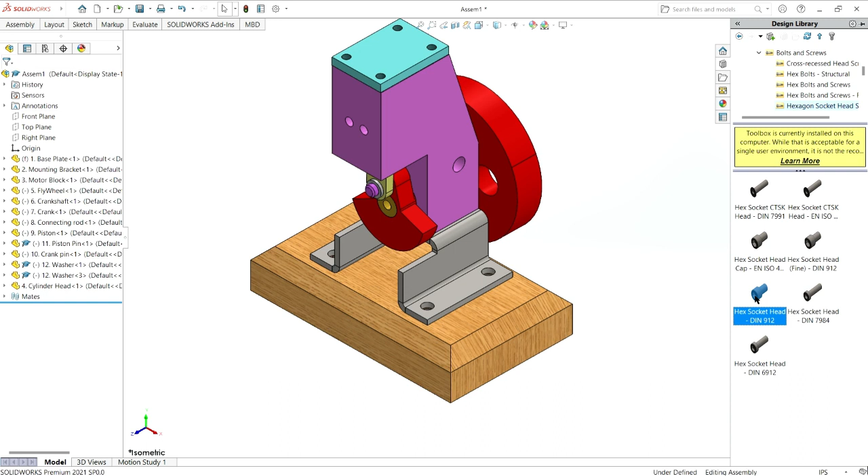For the next part, I will choose here. For the bolt, I will choose toolbox and choose DIN, go to bolt and screws, and here I will choose hexagon socket head screws, and I choose the DIN 912. Here I will drag it here, size M4, and the length is 8.

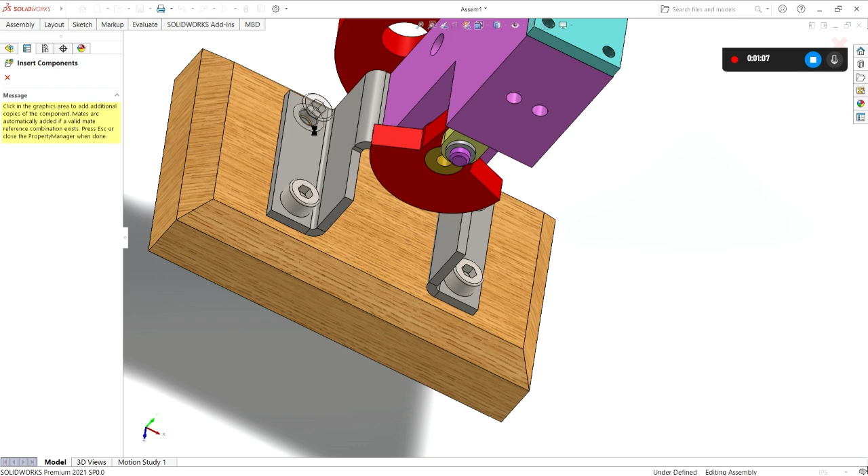So I will click right and choose and put it on another hole. Here, put it here and here. So we got another 2 holes at the bottom of the motor block. So I will put it here and also here.

Okay, then for another 4 bolts on the top of the cylinder head, I will choose the same socket, which is DIN 912. I drag it here and put it at the hole, and using size M3 and the length is 12.

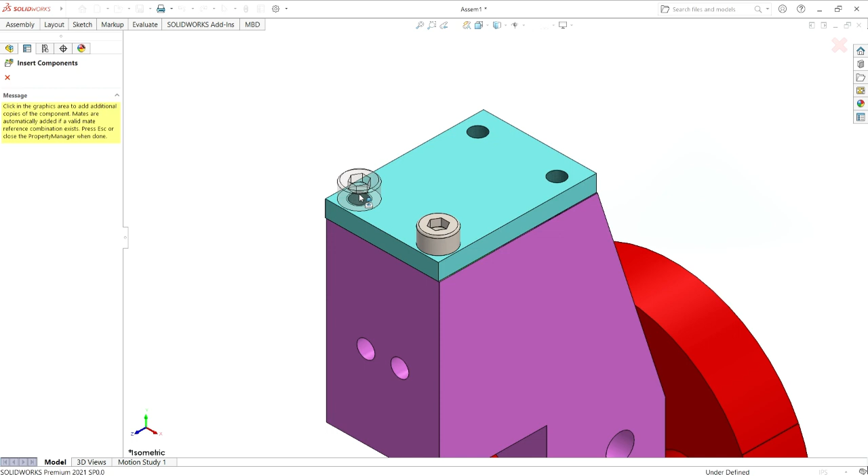So I click right for the configure component and put it on all the holes. So click here, and this is the final result of my pneumatic motor. That's all from me. Thank you.